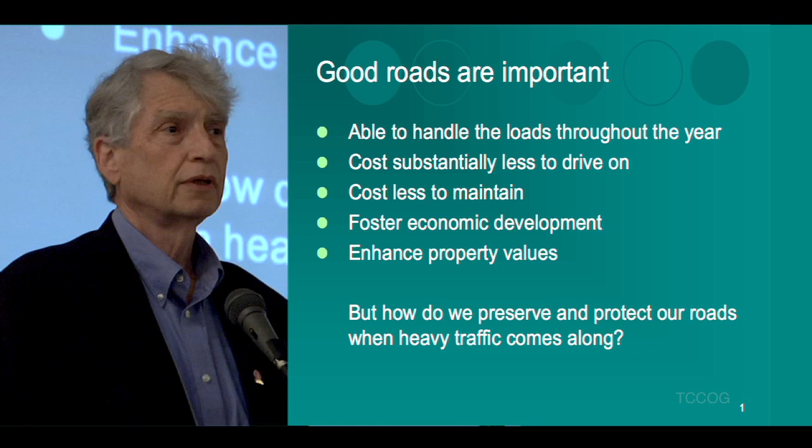New York State is pretty well roaded. There's not a lot of new major routes that are going to be built in the future. Some subdivisions are still yet to be built, perhaps, and some standards on what the roads in those subdivisions should look like can be promulgated. But as far as adding to our road system, we've got about 110,000 miles of road in this state, and that hasn't changed much in the last 30 years, and it's probably not likely to change much in the coming 30 years. So we're pretty well roaded.

Thus, we can conclude that we've got the road system that we need. It goes where we need it to go. But how do we protect our roads, especially when you get into heavily loaded traffic? That's what we're going to talk about for a while.

First of all, we need to understand the basic principles of what's going on with the road. This is a quote from the National Center for Pavement Preservation, headquartered at Michigan State University, but serving the whole United States. They define pavement preservation as a cost-effective set of practices that extend pavement life and improve safety and motorist satisfaction while saving public tax dollars.

I would point out that it's not only public tax dollars, but your own pocket money that goes into roads that are safe and smooth and work well. So this center provides a lot of information for local governments to use in trying to determine what is the right thing to do at the right time in maintaining and preserving your roads.

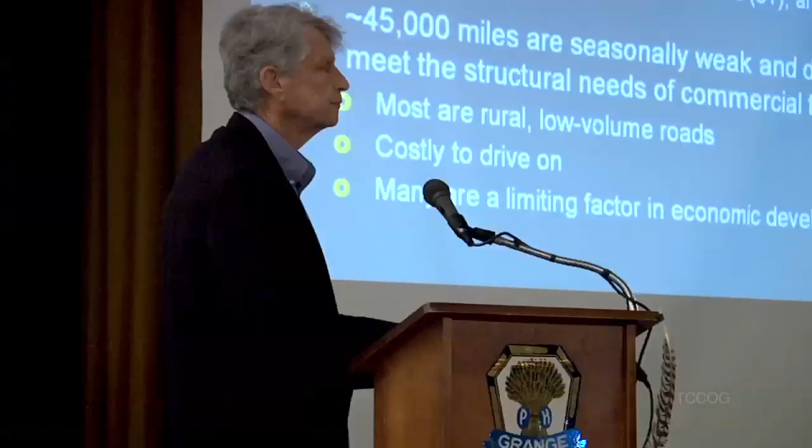One thing that came across my radar screen not that long ago was a time when we switched from hauling milk from dairies in single-unit vehicles, steering axle and a drive axle, to semi-trucks with steering axle, drive axle, and trailer axle. Those larger vehicles had a hard time getting across weak bridges, weak pavements, tight alignments that weren't really ever engineered. They were roads that went from Bill's to John's barnyard and then on over to Pete's 100 years ago. It was a pathway for a horse and buggy, and it got converted in the early 1900s into a town road.

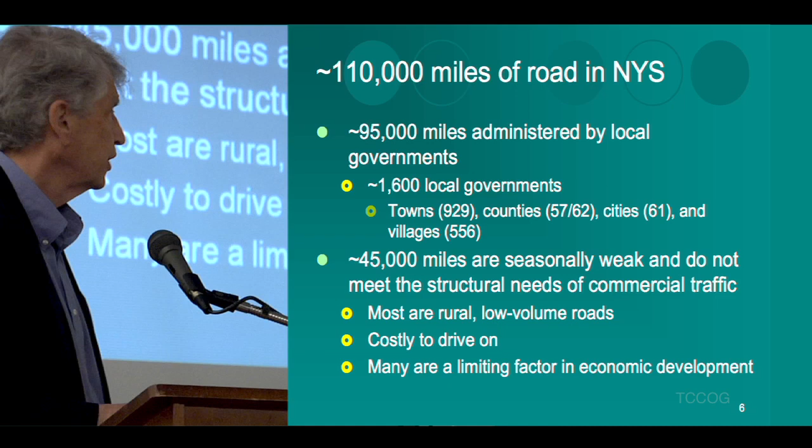Along about 1990 or so, we switched over to using much larger milk hauling vehicles, and they couldn't maneuver these roads. So guess what? Some of you may be aware that Queens Farms systematically dropped every dairy that was on a local road and went around signing up only dairies that were on main highways so they could get their trucks in and out. Too bad for anybody in the dairying business that was off on one of these side roads. That's just one of many examples of how our road system, particularly the weak roads and the poorly aligned roads, can be a factor in economic development.

How come nobody's interrupted me yet? Too early in the morning?

Okay, let's do something together. I want you all to say the word something. Ready? 1, 2, 3. Something. Now you can go back and say you said something at the meeting.

All right, so state highways. Generally speaking, the alignment of state highways was engineered, meaning the layout, the alignment, its curvature, vertical as well as horizontal, was calculated. Pavement thickness was calculated. The traffic was determined and predicted in advance, and the pavements were designed to support a substantial number of very heavy vehicles. If you hit a road like that with a burst of heavy traffic for development of a gas well, say over a period of 3 or 6 months, it's probably not going to have any consequence at all. It would use up a minuscule fraction of the life of the road.

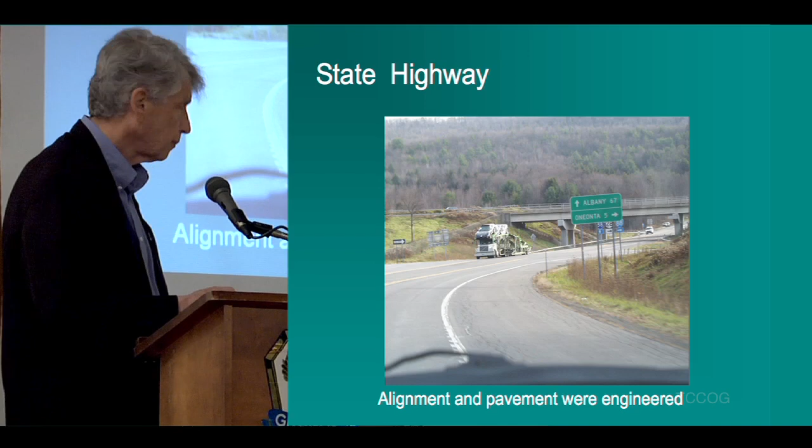Well, I suspect what you're thinking about was associated with the garbage hauling up into, where is it, Cayuga County, I think? No, this is a quote-unquote leaked document where New York State DOT was looking at the impact of frac trucks.

Well, I disagree with them. I don't know what was motivating such a thing, but we've run some numbers in our operation at Cornell, and according to our calculations, you wouldn't know it on a state highway for one well. Now if you had hundreds and hundreds of these things going on for years, that's a different colored horse, but the impact of just adding a little bit more truck traffic to what's already out there—if you're dealing with roads that have 10,000 vehicles a day, 5 to 10% truck traffic, and you add another 1,000 trucks, I think you know, without even having to calculate stresses and strains, that it's not going to have a major impact.

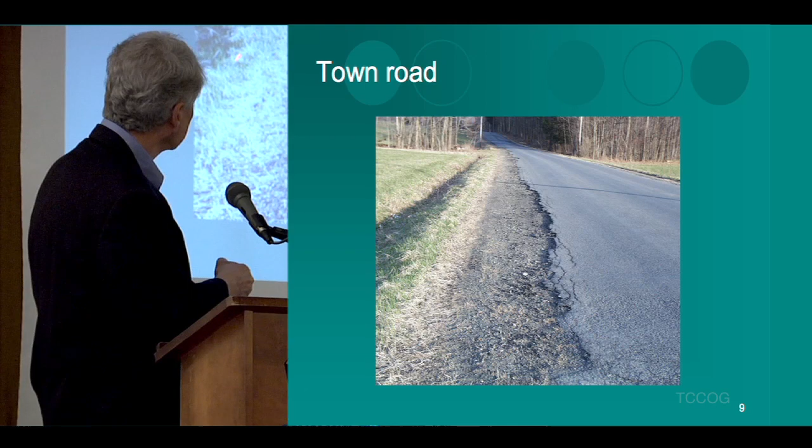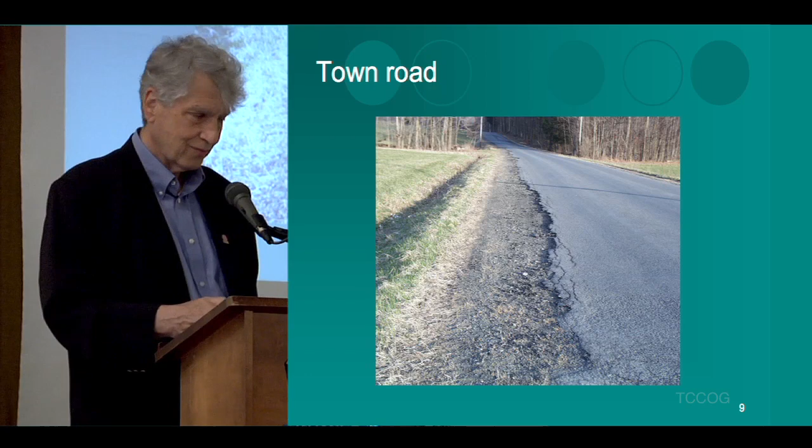Road strength isn't constant throughout the year. That's a principle that I'd like you to remember.

Local roads often are seasonally weak due to poor drainage and due to the use of low-quality materials. What do I mean by low-quality materials? Well, sometimes we open up a gravel pit and it's got a lot of silt and clay in it—not ideal for serving as the base course for a road. It might have been fine once upon a time when that road was a gravel road. It had to have some silt and clay in it to hold the larger stones in place, give it a little bit of abrasion resistance and so on. But it wasn't paved, so any moisture that got in there could come up through, the road could breathe, and it would evaporate away.

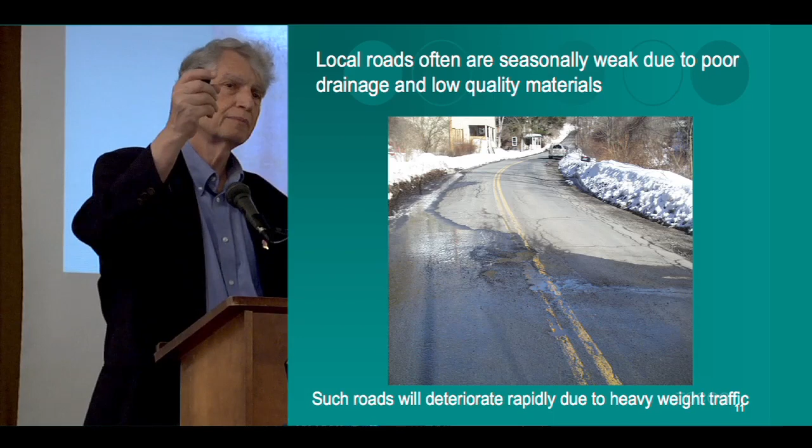Enough fines in there to shed water so that water didn't penetrate going down from above too much. But then we pave over it—we say, let's pave our roads. So we get out there and we put a thin surface, just a membrane. And you've all had the experience of laying a tarp or a tent out on your lawn overnight in summertime. Next morning you get up and you lift that tarp up, and what's dripping from the bottom side of the tarp? A whole bunch of water, right? So that's evidence that water comes up. When it hits an impermeable surface like the plastic tarp or a sheet of paper, it condenses in the cool air and makes the area right beneath it very wet.

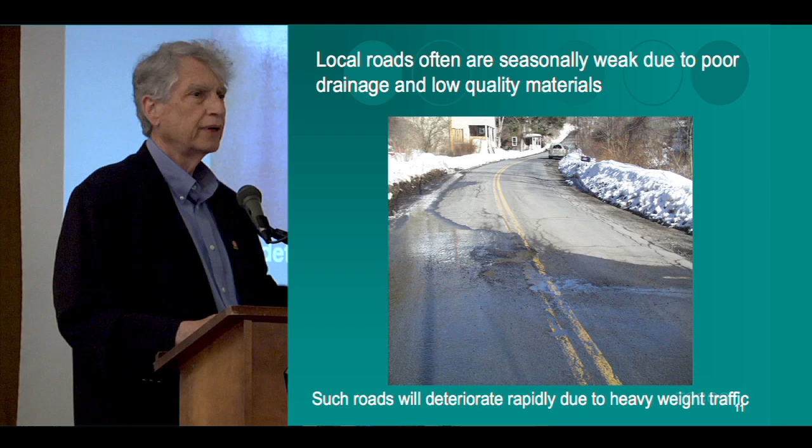You put together the combination of water and high fines content, high silt clay content of the materials, and you wind up with a situation where the bearing capacity, the structural supporting strength of the material, is very poor. So such roads deteriorate rapidly, especially if you have heavyweight traffic. And so we'd like to avoid creating any more of these if we can.

What do we do about it? Well, we have to pay attention to the drainage needs of the road. Putting out cones doesn't make the water go away. We need some downhill slope.

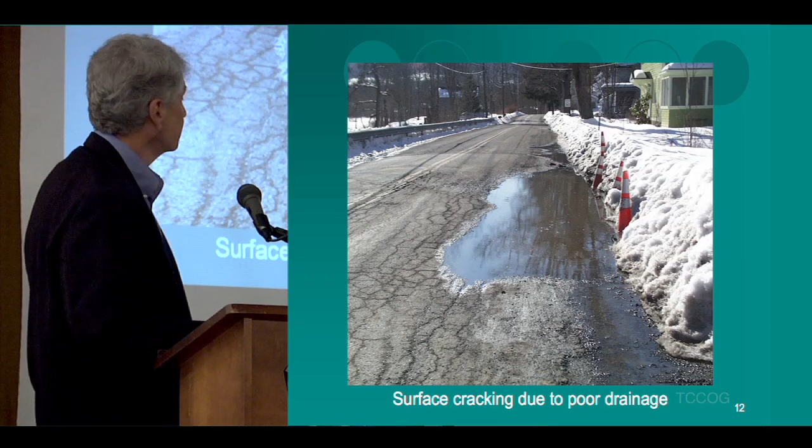You can see that the water has caused regional cracking in the area of the surface because of the combination of water and weak materials beneath the surface. And spring thaw aggravates that situation quite a bit.

This is sort of a concept of how road strength, or bearing capacity, or load supporting capability varies with time of year here in New York State, if we go from January to December. When the ground is frozen, the road is very strong.

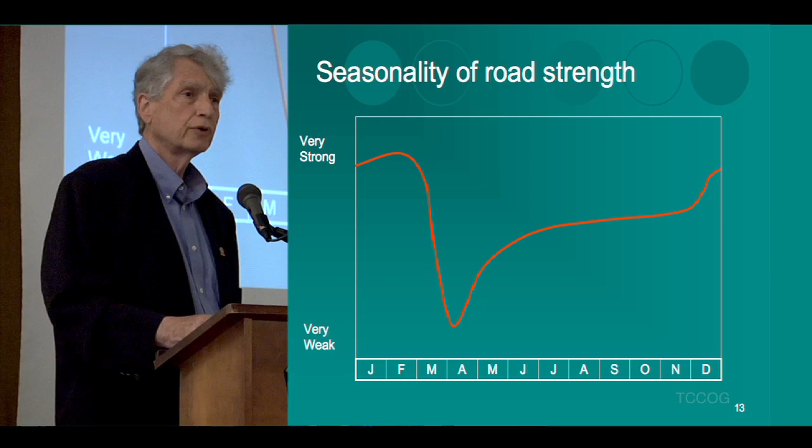Probably can't hurt it with the biggest loads you could throw at it. But then we get into a period of weakening with that interaction between water and thaw.

Generally, roads thaw from the top down as well as from the bottom up. So you wind up with a situation where there's high moisture content in the road, a still frozen zone, and then a never frozen zone. That still frozen zone prevents water from going down, and it's usually too cool to promote any evaporation of consequence. So it's sort of like trying to drive a truck on a waterbed. It doesn't work too good.

But gradually over time, as we go through the spring and on into the summer, there's a continual increase in strength until we get frost penetration back down in the road again, and it goes up to very strong. That's pretty much what happens.

So when we drive a vehicle on a road that exhibits this kind of characteristic, it makes a whale of a difference how much damage for a single pass a given vehicle would make, whether it was right at the bottom of spring thaw, or whether it passed right there at the top of the frost season. How much damage it does.

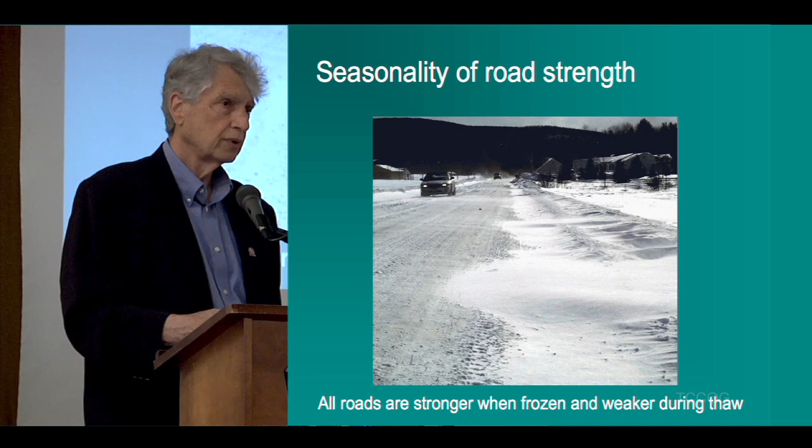All roads are stronger when they're frozen and weaker during thaw. That's true of state highways and local roads and so on. Just the magnitude of that difference between winter and summer is a lot more noticeable on local roads.

So the damage per pass of one truck is not the same on strong state highways versus weak local roads. The damage per pass of one truck is not the same at different times of the year on a given road. And thus cost allocation, when we try to figure out what the bill to the user of the road should be, cost allocation based on the number of truck passes is a flawed approach.

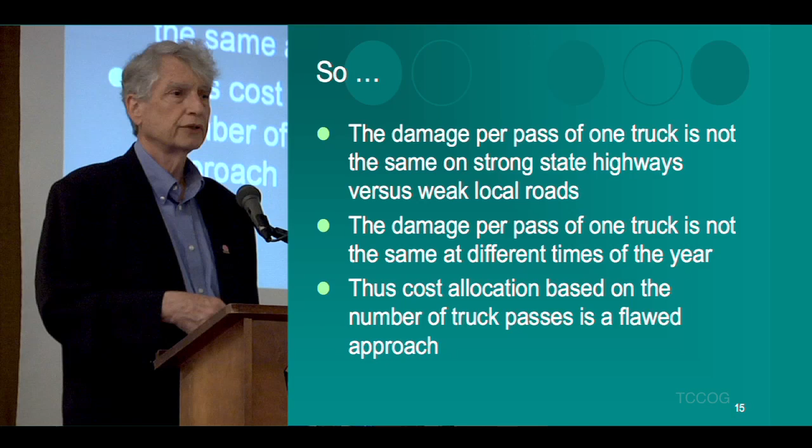And to the best of my understanding, that's exactly what Pennsylvania is using. They just said, tell me how many truck passes you're going to have, and we'll tell you how much you owe us for damage to the road. And I'm saying, well, now wait a minute. It makes a heck of a lot of difference whether those trucks went over in December or whether they went over in March as to how much of the life of the road got used.

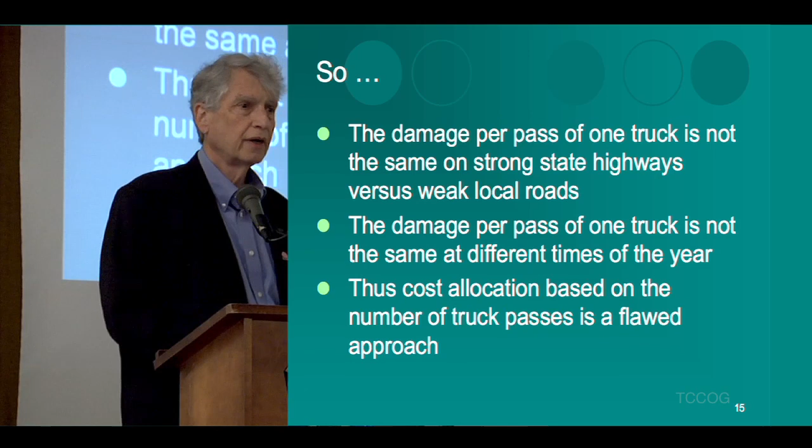So we need to get a little bit more sophisticated, I think, than just a cost per trip or damage per pass or cost per pass type of approach. Roads deteriorate over time.

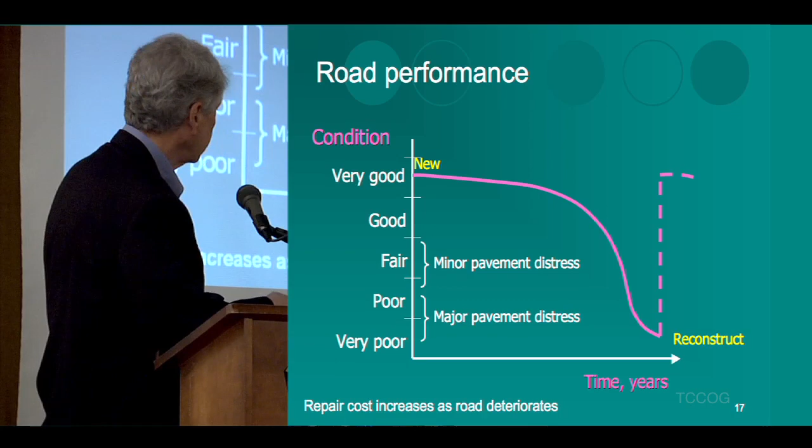This is referred to as the performance curve. Now our time span is in years, and that could vary from one category of road to another. For a state highway, the time from real good condition to totally gone to pot might be 30 to 40 years. On that chip sealed road that I was showing you earlier, the town road might be 3 or 4 years.

So a lot depends on the structure that's there, what this time scale is, but all roads tend to follow this kind of a pattern: when they're new, they stay in pretty good condition for about two-thirds of the life of the road. And then the effects begin to become evident. Finally, as we get down into what we refer to as fair and poor condition, we begin to see visible distress.

Well, that leads to an interesting thing. If we try to figure out how to allocate costs for road damage based upon distress, going out and charting the cracks and the ruts and so on and so forth, we've got to have distress in order to be able to do that. Which means that if you happen to have a road that was recently rebuilt...

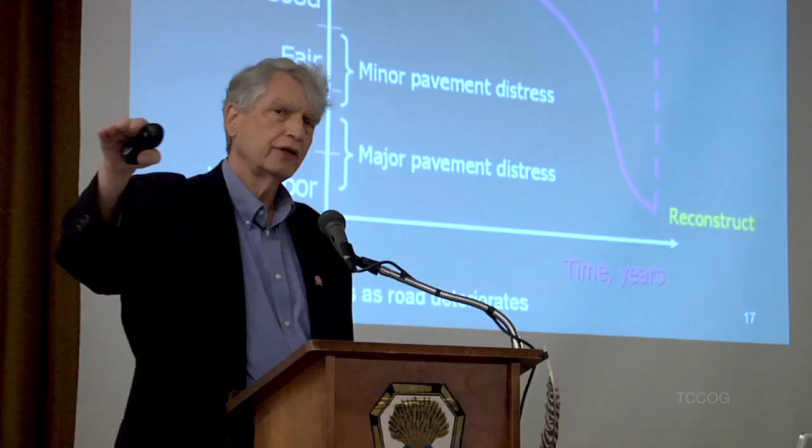Well, there hasn't been too much change in traffic over time. There's 1 or 2% growth per year in a high growth area, and less than that in a standard growth area.

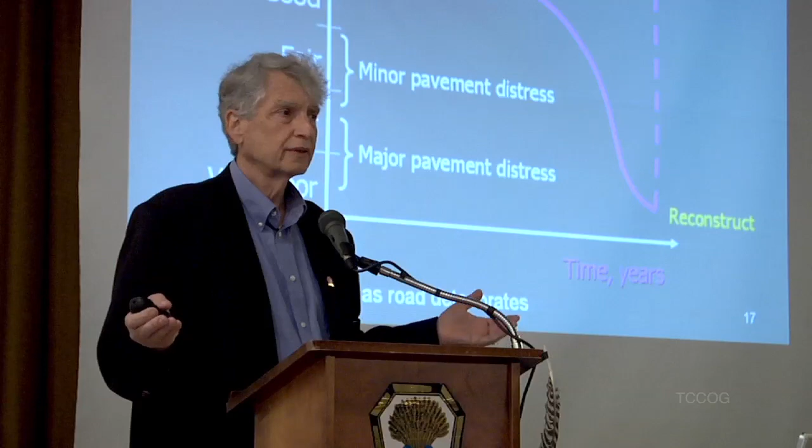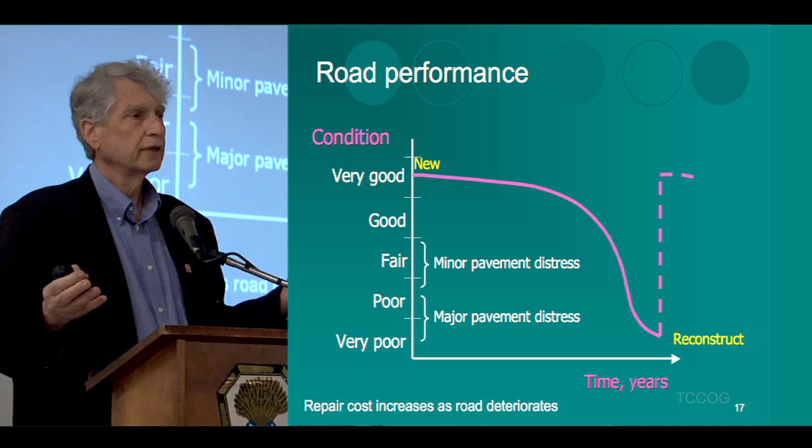If things don't change much more than that over a 10, 15, 20-year period, you're not going to see too much difference between when the road is new and when it's used up. So we develop a body of knowledge. When we divide the state into 1,600 units of local government, each unit has a small patch, slightly larger than a breadbasket but smaller than would extend across different physiographic regions or soil types. So we gain from experience, and we have a pretty good sense of how long it's going to last. The person in charge of the road system does what is needed when it comes time to reconstruct or recondition a road, based upon past experience.

If after that commitment has been made and the taxpayers have forked over their money to build that road, there's suddenly a jump in heavy truck traffic, even for a short period like 6 months, which is about how long it takes to develop a wellhead, you wind up using up a pretty large portion of the life of the road. So the engineered road isn't as adversely affected as the ones designed by experience.

One other follow-up question: typically local governments don't let roads go all the way to the point where they need to be reconstructed. So what would this curve look like if you were to do some intermediate repair or resurfacing?

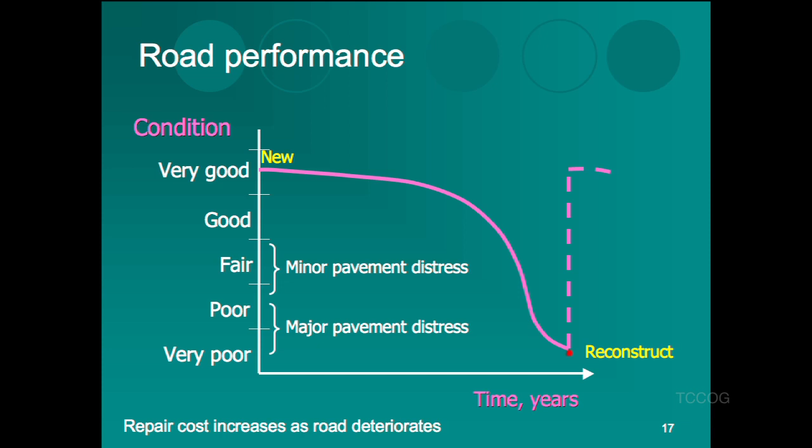Did I over-answer your question, or did I answer your question? The thing I'd like you to notice is that the distress doesn't begin to show up until you get into the last third or so of the life of the road. And if you repair that road, put it back up to good condition—smooth and very good—it costs less to do that than if you wait until it's badly deteriorated and then try to fix it.

If I understand what you've just said, if you wanted to charge the trucker for the decrease in lifetime of the road, it wouldn't be enough just to measure the decrease in quality of the road—you'd have to know where on this curve you were, which might be tough to do. There's a better curve we could work with, and we'll work our way toward that better curve in a few minutes.

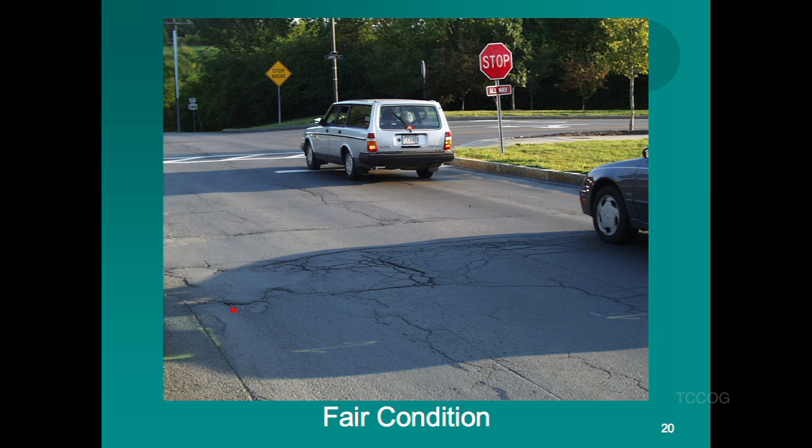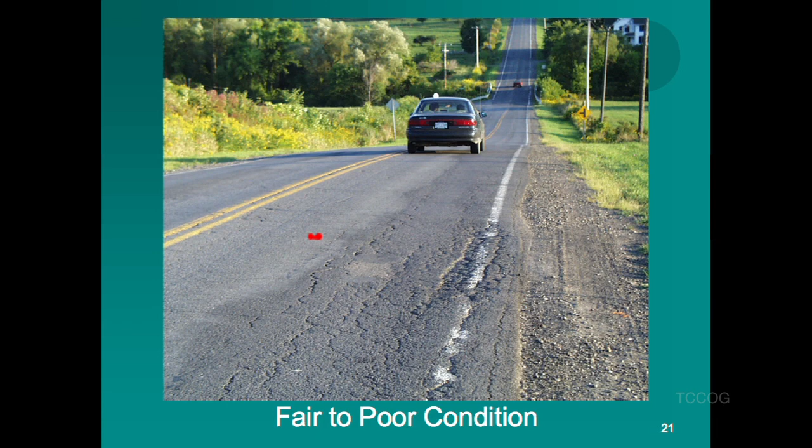Here we've got some patching, minor cracking, probably due to frost heaving, maybe a utility cut. So that's fair condition. This could either be fair or poor, but over here on the side it's poor. Out here in the middle it's fair, so I just call that fair to poor.

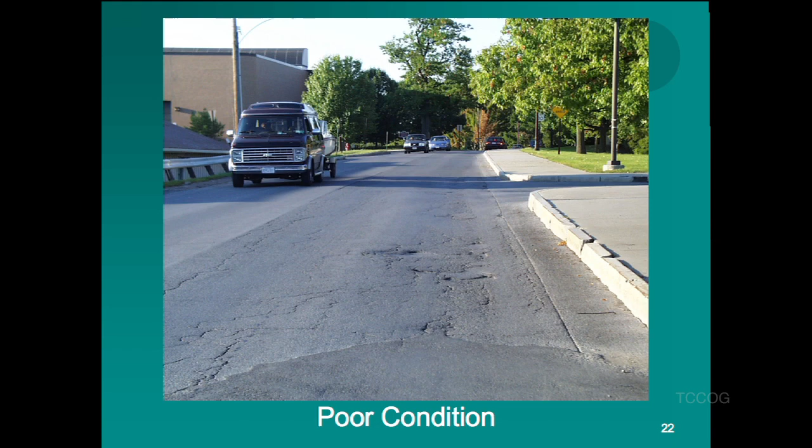This is definitely getting into the poor condition. There's a big patch that I'm standing on there, and some pretty significant roughness. Longitudinal cracking, transverse cracking, pothole. So that's about what you'd call poor.

Probably on the order of 35 to 40 cents when you take taxes out. You have to be very careful about how you do this economics of roads, when you account for taxes, because where does the highway department get its money to build the road? Taxes. Who's paying the road user costs? The driver. Who's paying the taxes to the highway department to build the road? The driver. And so if you aren't careful how you handle the numbers, you'll double count those taxes. So this is on the order of 35 to 40 cents.

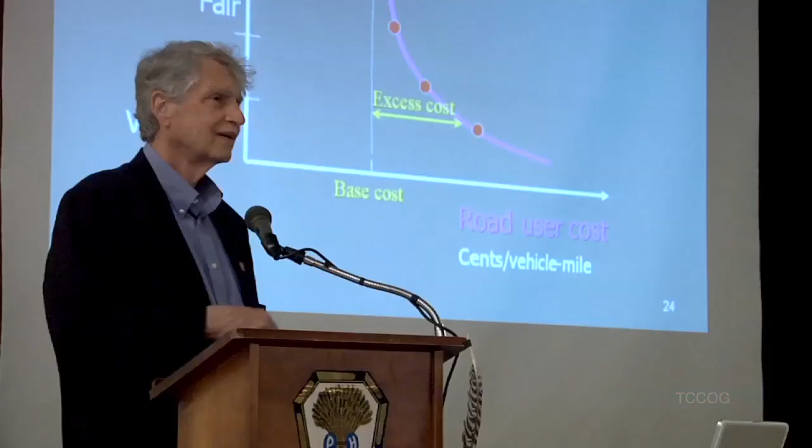Sorry, but the other way around, have the cost be vertical? I used to have it the other way around. I switched it so that it would tend to, well, you know the other graph that I had there. I wanted to get two scales that were common rather than having it vertical on one and horizontal on the other. Shoot me. It's okay.

Another question? So, the highway department spends money to build a road and maintain it. Road users spend money to drive on the road: vehicle depreciation, gas, oil, tires, new shock absorbers every now and then, and so forth. How many here would say that the road user cost is 50% or less of the sum of the two parts? How much the highway department spends to build and maintain the road, plus how much the road user spends to drive on the road. All the traffic collectively: 50% or less is road user costs, 50% or more is highway department costs.

How many would go there? A couple. Okay, wrong. Too low. I know I did. I sucked you right in, didn't I? So let's bump it up here.

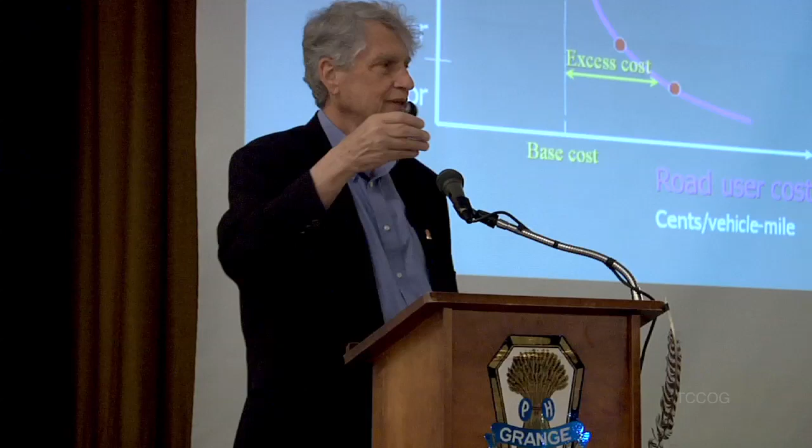How many of you would, I'll tell you that we're too low at 50% road user costs. How many of you would go with 75% road user cost, 25% highway department? Now how many of you we got in the game? Plus all of those that raised their hand earlier, right? Because you're covered. Okay, still wrong.

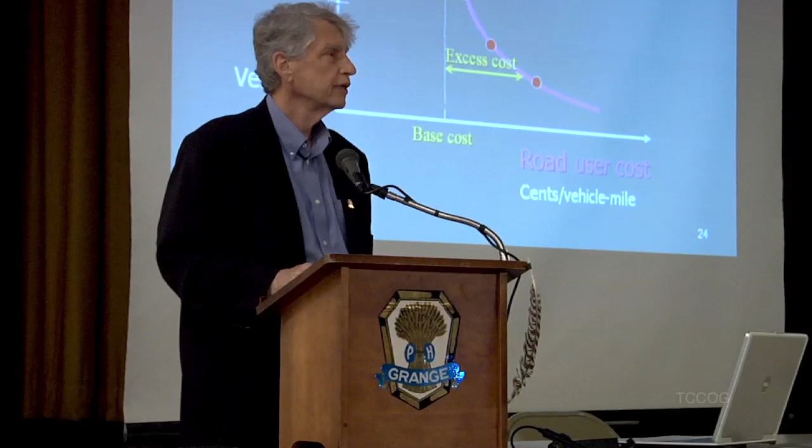Shall we go for 90? How many of you would say road user costs are about 90%, highway agency costs are about 10%? Show of hands. Not very many. How many of you say it's more than 90?

Well, it doesn't make too much difference whether we're talking interstate highway or town road. It ranges in a fairly narrow band between 90 and 95% of all the costs of going on a road is road user costs. 5 to 10 cents on a dollar is paid for by the agency, spread out over a substantial number of years.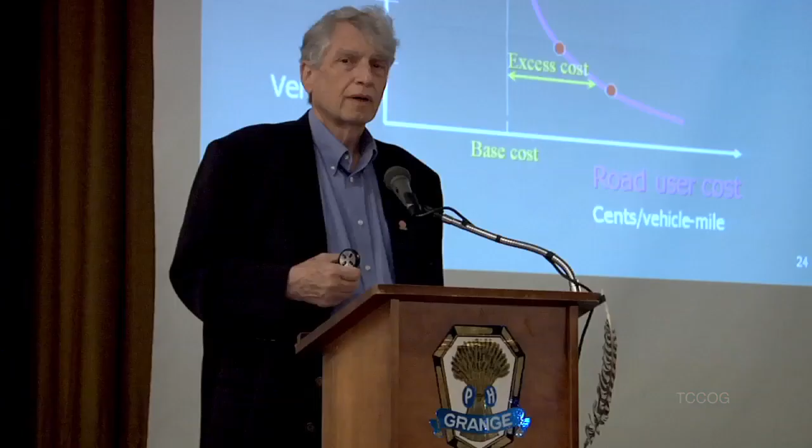And so when I see a road in very poor condition, my wallet begins to twitch and I begin to say, please, please, please spend a penny of your damn nickel to make my 55 cents per vehicle mile go down to 45 cents, if you would, please. And it turns out to be very cost effective to keep roads in smooth condition.

But how on earth would you explain, with all the training we've given the citizens of New York State, that we don't come out and fix roads until they cause complaints? How would you explain to people that you're out there repaving a road that looks perfectly good?

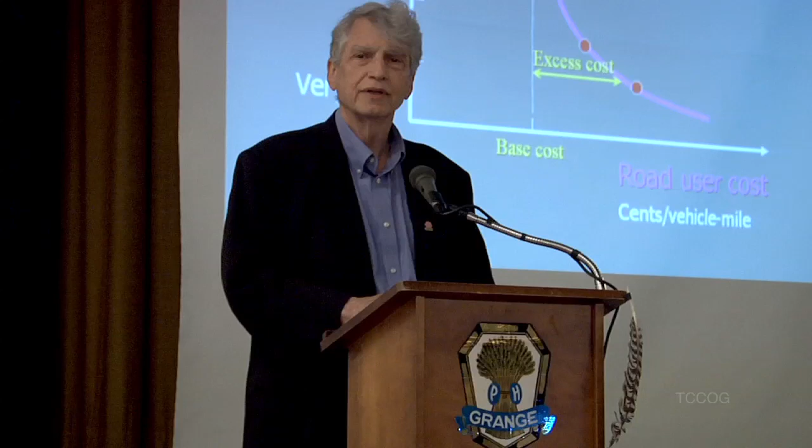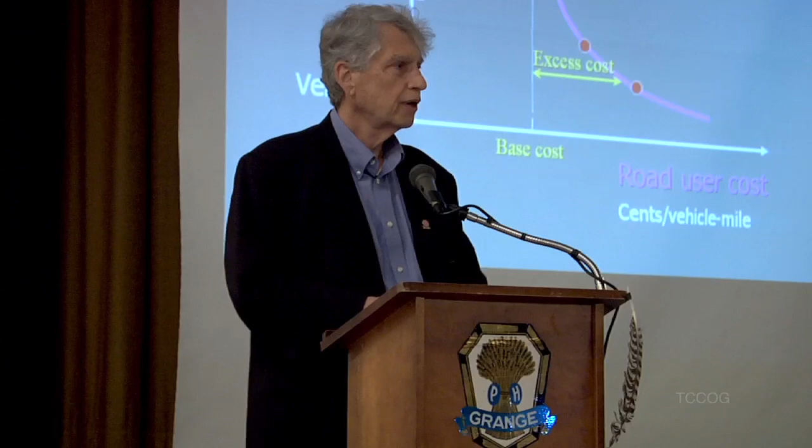Be tough, wouldn't it, when there's other priorities? Those funds have to compete. Those roads have to compete for funds with other priorities. So we can let it go.

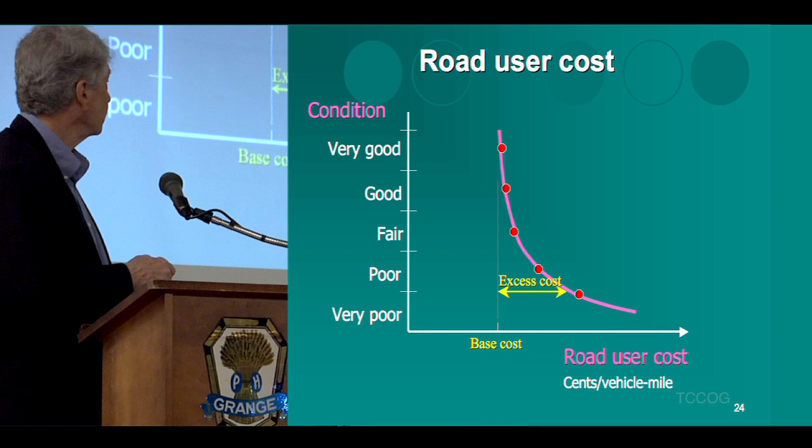But the consequence of letting it go is this excess road user cost. If the public knew what we're doing to them in terms of excess road user costs by having weak and deteriorated roads, they'd probably get pretty concerned.

So I was planning on sending an article into the Syracuse newspaper to tell everybody this.

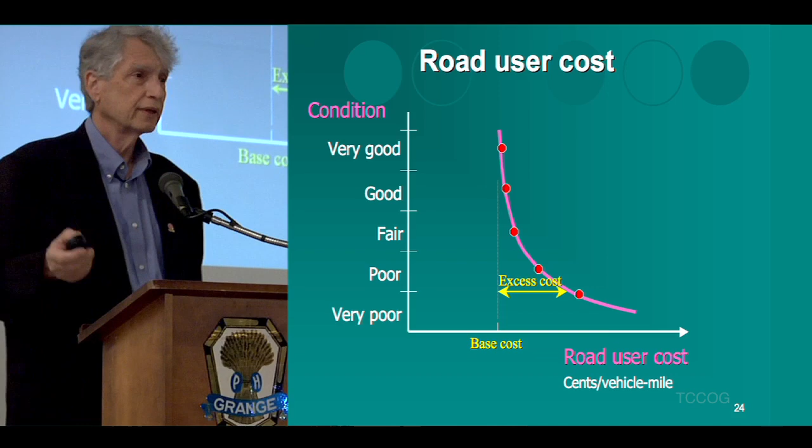So, basic engineering principles. What causes road failure? Heavy loads, lots of traffic, seasonally weak materials, poor drainage, and just the passage of time, which in engineering parlance we call cumulative damage. All of these cause that condition curve to take a dive eventually and go from good to poor condition.

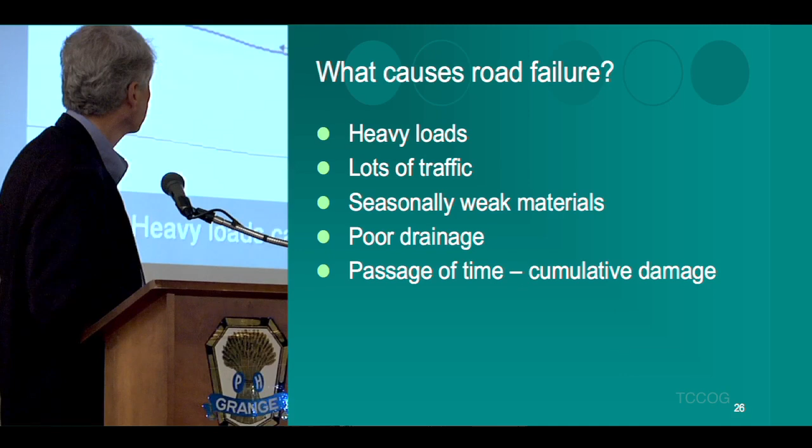What's going on in the roadway underneath the vehicle tire? Let's think of it as a truck tire. It's got a tire pressure that pushes on the surface and an axle load that pushes on the whole system, which bends the surface, bends the base course, and puts a vertical pressure on the subgrade.

Heavy loads cause big deflections. Why do we care? Because big deflections cause roads to not last very long. So why are state highways able to withstand lots of heavy trucks and town roads aren't? Well, they put more substance in there. They typically use better quality materials, and they sure as heck put them down a lot thicker.

My colleague David Orr and I have been out coring roads around New York State on state highways for a research project over the last few years. We've come up with as much as, I think the biggest was 17 inches of asphalt concrete that had accumulated over time on roads that were perhaps first paved around 1930 or so. You'd see a layer, then another layer, then another layer and another layer, and by the time you cut a hole in it, it was 17 inches deep. And that was just the asphalt. Underneath that was a heavy layer of unbound gravel as well.

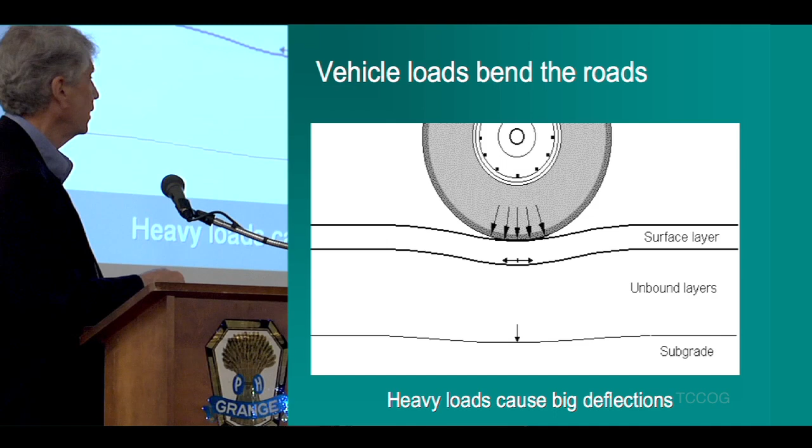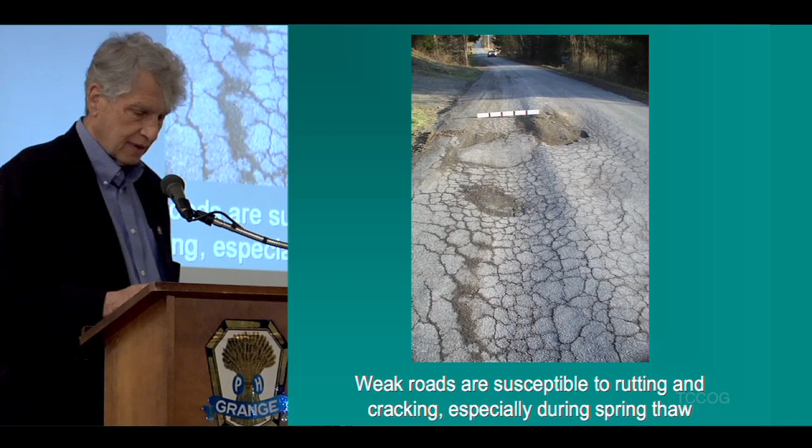I used to have a colleague that said no student project was ever a total failure. It always could be used as a good, bad example. And I think this is, without any doubt, a good, bad example.

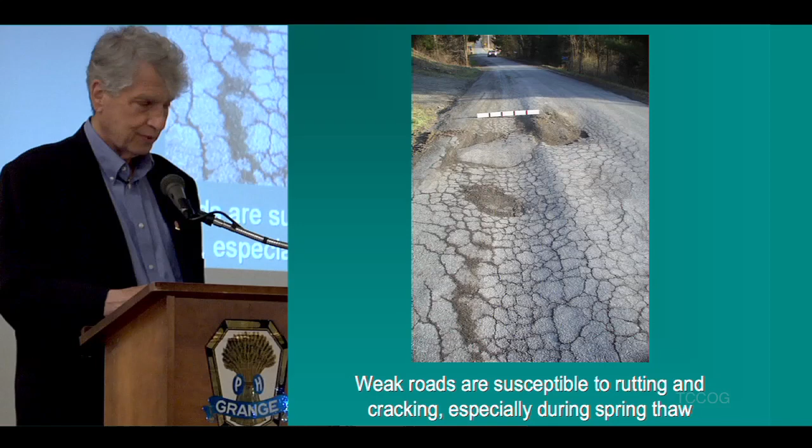So let's think about something that you've probably done absent-mindedly, just sitting at your desk or somewhere in history. You took a paper clip and bent it back and forth and back and forth and back and forth, and pretty soon you had two halves of a paper clip, did you not? Anybody here who has not yet done that? 100%. Okay, we have something we can talk about together then.

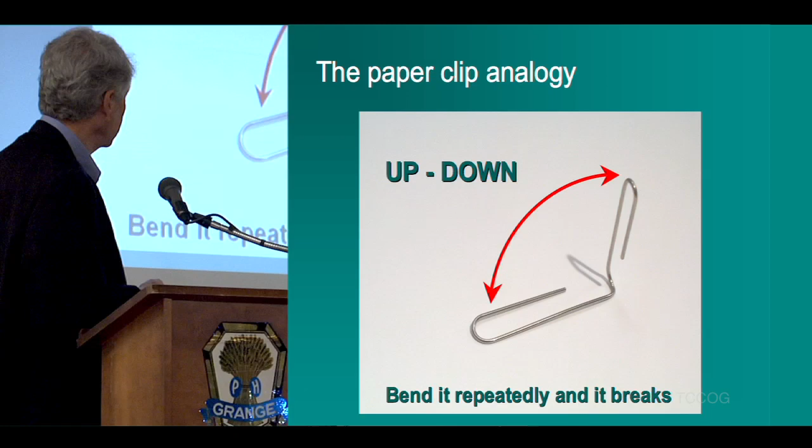So if you took a paper clip and bent it repeatedly, it breaks, but let's make it a little more complicated. Let's take a dozen paper clips and have three conditions. One, we open it up to 45 degrees and then fold it back down. Take a different paper clip out of the pile, open it up to 90, bend it back down to closed. And then another one, 135, which is 90 plus 45, and bend it back down. What do you suppose is going to happen?

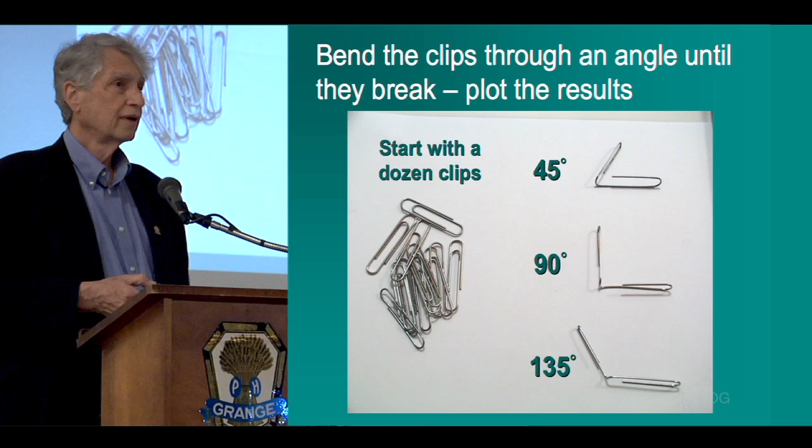Eventually, they're all going to break, but the one with the bigger angle is going to not take so long. So here's what it looks like.

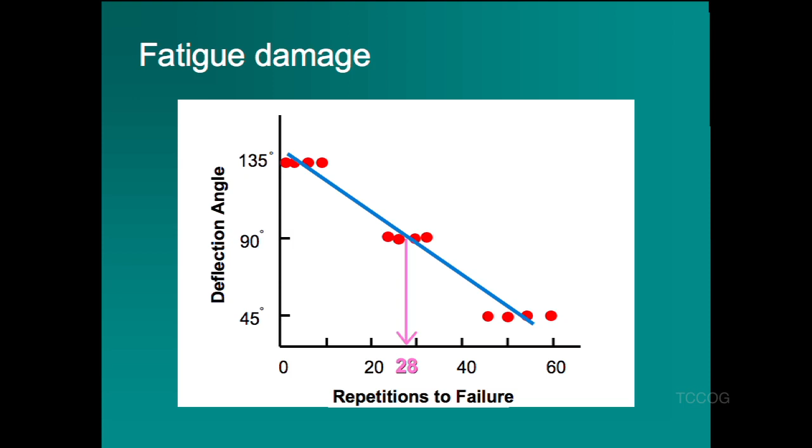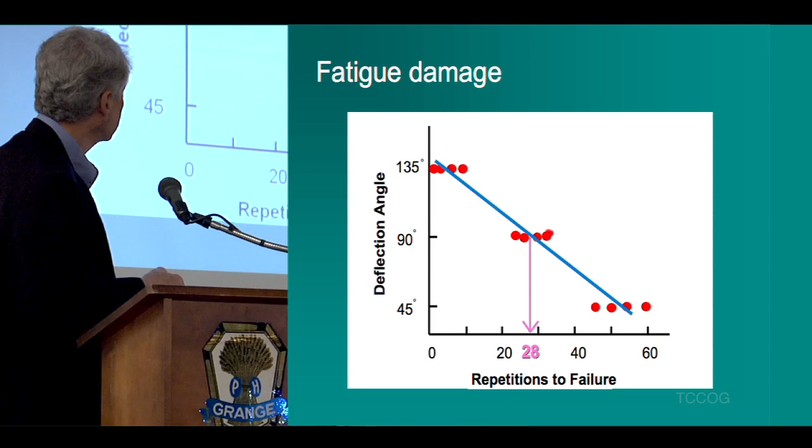At 135 degrees, just a couple of bends back and forth, and it's kaput. At 90 degrees, it lasts a little longer, and you'll notice how the data is scattered—a statistician would say it's stochastic. You don't get the same number of repetitions to failure out of every paper clip, but as a group you can begin to find an average. The blue line represents the average, and at 90 degrees the average is about 28 repetitions to failure. These are the big, hefty paper clips, not those cheap little things with notches in them.

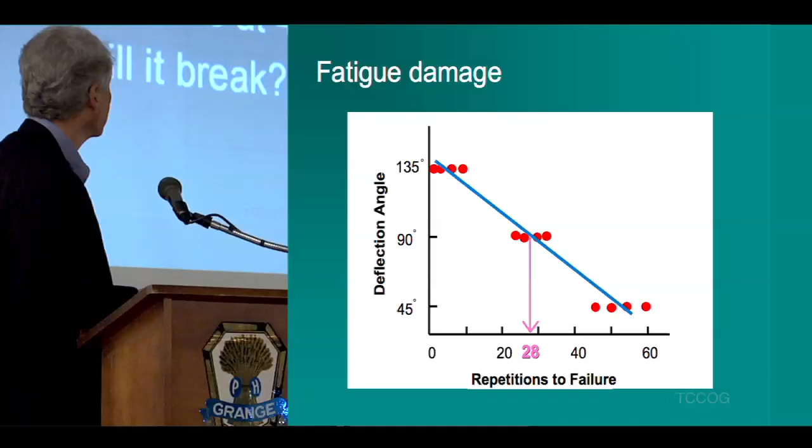Okay, let's make it even more fun. Let's bend one paper clip 10 times at 90 degrees and 22 times at 45 degrees. Who can tell me whether it'll break or not? No? What makes you say no? Who said that? You're right.

Here's how I know you're right. We'll take that curve and discard the data points since we don't need them—we'll just work with the blue line. At 90 degrees, we could allow 28 repetitions, but we're only going to put on 10. So 10 out of 28 allowable is 36% of the life of that paper clip.

Now we'll bend it to 45 degrees. We could expect 52 repetitions, but we're only giving it 22—remember, 22 of these and 10 of those. So 22 divided by 52, added to the other, gives us a sum of 78%. That's the cumulative damage. It's stochastic, so it might break at 78%, but that's far enough from the line that I'd be willing to bet it wouldn't break. So you're right—you see how that works?

This could be a heavy truck, and this could be a not quite so heavy truck—that could be a Volkswagen. But depending upon the vehicle, the amount of damage per pass differs as a function of the loading.

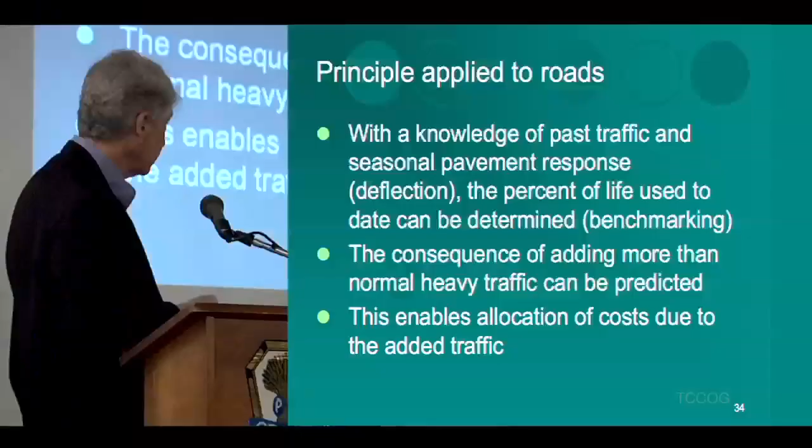So when you apply that paper clip principle to a road, with knowledge of past traffic and seasonal pavement response—pavement response just being fancy words for the deflection of the road—the percent of life used to date can be determined. That's what I refer to as benchmarking.

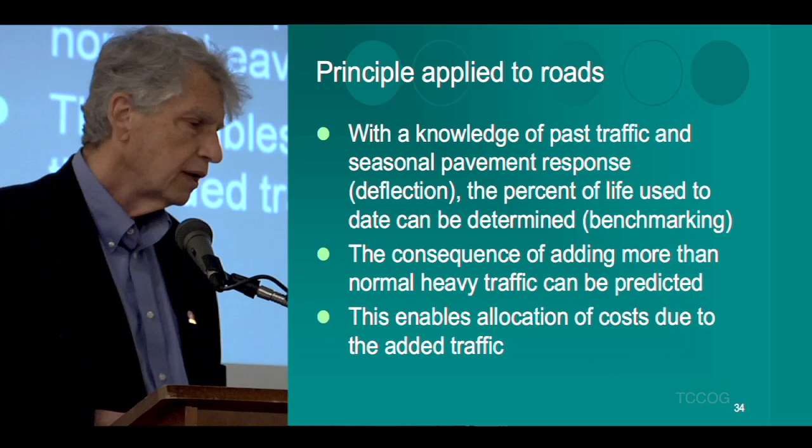The consequence of adding more than normal heavy traffic can be predicted, and this enables allocation of costs, especially if I leave it alone, due to the added traffic.

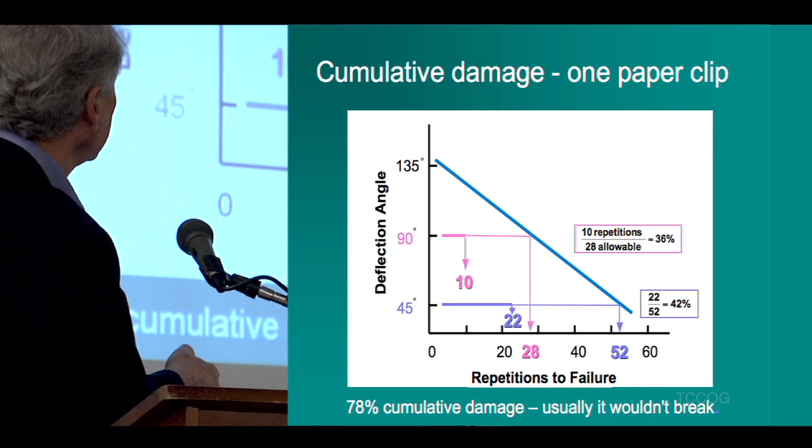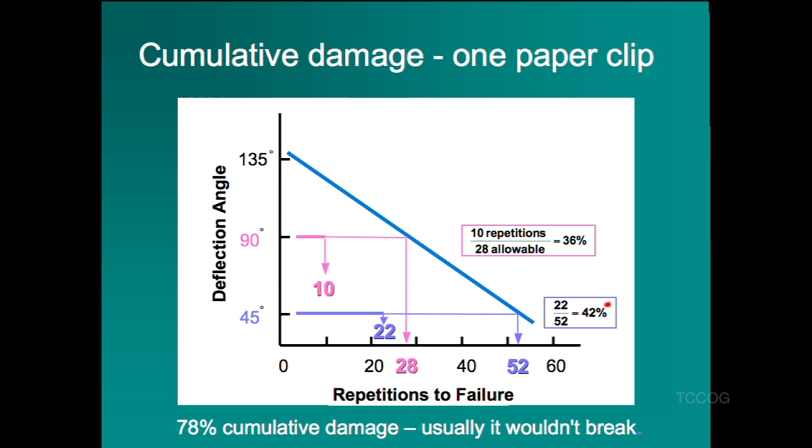So we have a mechanism here. If we have this kind of information for the materials, and a means of measuring the pavement deflection or response, we can get into something with real science behind it—figuring out what would happen if a burst of heavy traffic were superimposed on top of normal traffic, and how much of the life of the road is used by the heavy traffic versus the remainder.

Now we need to talk a little about policy, because while engineering influences things, policy as developed by policy-making boards has an impact too.

As mentioned earlier, a road is built by the community to last a given period of time, or instead we could talk about it in terms of number of load repetitions—one translates to the other. That's based on historical traffic levels and experience. So the reason we have 3 inches of asphalt and 12 inches of gravel is because that worked over the last 25 or 50 years.

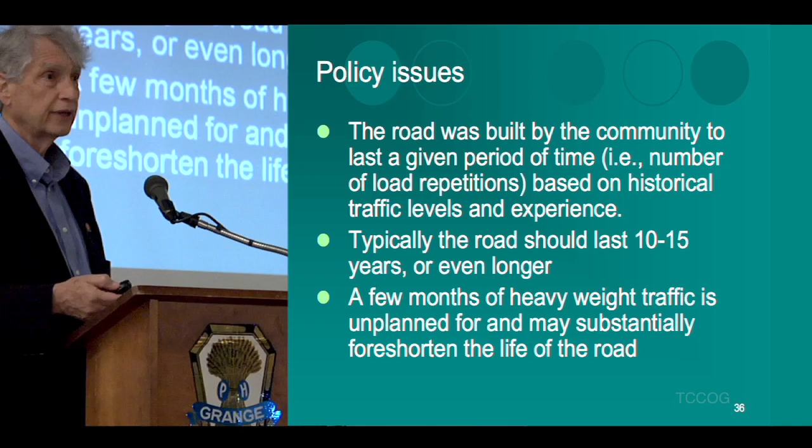Typically, what we design is expected to last 10 to 15 years, or perhaps even longer. But a few months of heavyweight traffic, unplanned for, may substantially foreshorten the remaining life of the road—whether we'll really realize the original 10 to 15 year expectation. It'll be less than that. So the policy aspect is that taxpayers aren't actually going to get the full life of the road due to unexpected heavy traffic.

Should the taxpayers pay for the lost life, or should the road user—particularly the one putting the heavy traffic on—pay for it? When and how much should the road user pay? Should it be paid before the first truck hits the road, or after the last one pulls off? What's the best strategy?

And this cumulative damage concept is the key. Question?

My understanding from listening to you speak before, and being my neighbor and having walked the roads with you, is that local roads that are not designed can actually take very few truck trips. Can you talk about the general load carrying capability of an interstate highway versus a state road versus a county versus a town road? How many trucks could they take? I know you speak in terms of ESALs, and maybe you want to define that term and spend a little time with that.

Yeah, I was not going to get into ESALs today, but I can. ESAL is an acronym for equivalent single axle load. We can take a mixture of traffic, everything from Volkswagens to overloaded trucks, and translate them into an equivalent number of single axles, 18,000-pound single axles, which was used in research back around 1960 or so. By doing that, it makes the computations more simple. We can talk in terms of how many ESALs a wellhead development is going to apply, and how many ESALs the road can expect to last. Instead of talking about it in terms of years, we can talk about it in terms of repetitions of load.

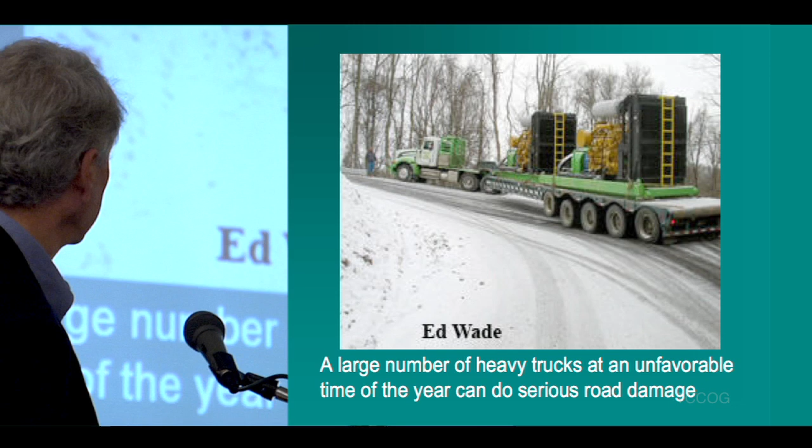So a large number of heavy trucks at an unfavorable time of year can do serious road damage, is the point.

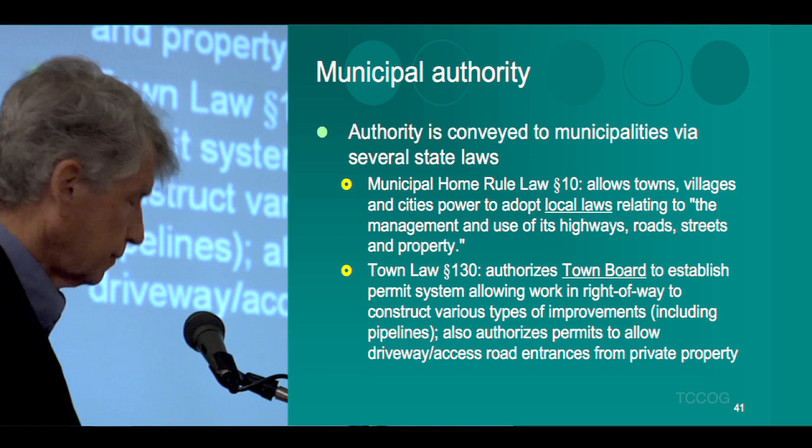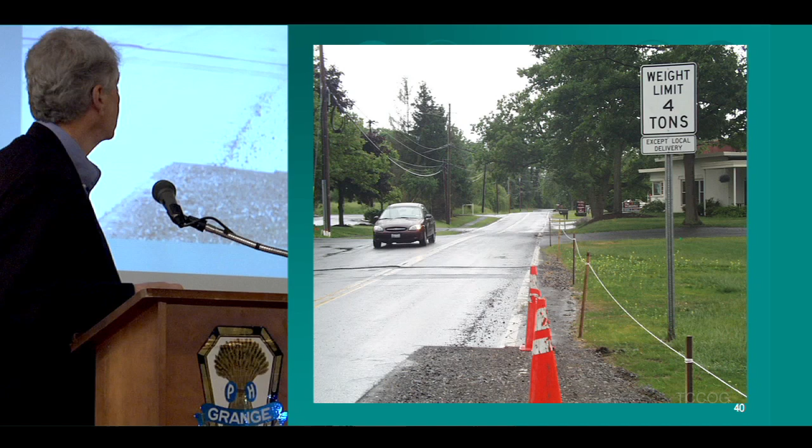What regulatory measures are available to you? Load limitations is one thing you can do, but that impacts everybody - the traffic the road was originally developed for. How many school buses are less than 4 tons? Not very many. How many garbage packers are under that? How many fuel oil trucks are under that? So you need to be cautious about how you implement policies in this regard, or you can have a huge negative impact on the local economics.

I'm not going to go too much into the authority because that's the subject of the next speaker, and I promised him I would only just kiss this.

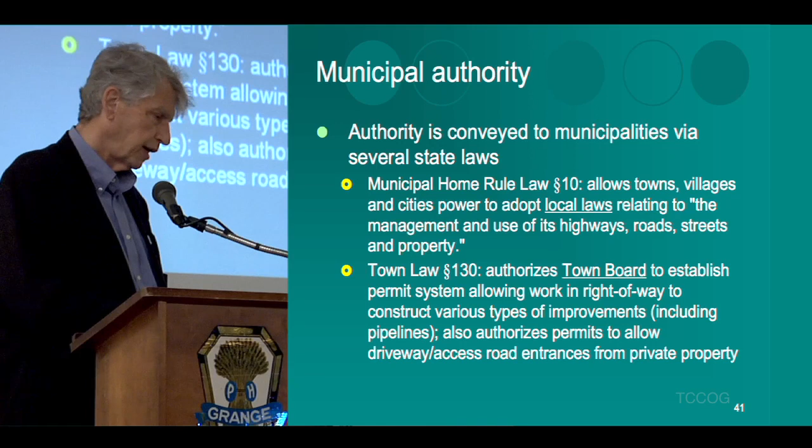Authority is conveyed to municipalities via several state laws. One of them is the Municipal Home Rule Law, which specifically allows towns, villages, and cities the power to adopt local laws relating to the management and use of its highways, roads, streets, and property. That's pretty vague. Town Law 130 authorizes town boards to establish a permit system allowing work in the right-of-way to construct pipelines, driveway entrances, and so on.

More meaty is a set of laws in the Vehicle and Traffic Law that need to be adopted by local law or ordinance, enabling you to set weight limits, designate truck routes, and set hours of operation for use of such vehicles. So you have the authority, and you really don't even have to write your own laws - you can just cite and adopt these sections of Vehicle and Traffic Law.

Up on the web at the Cornell Local Roads Program website - you can Google Local Roads Program, or even just Google local roads, I think Cornell comes up top of the list. At our website, you can get a little booklet of model laws that you can use to adopt these model ordinances.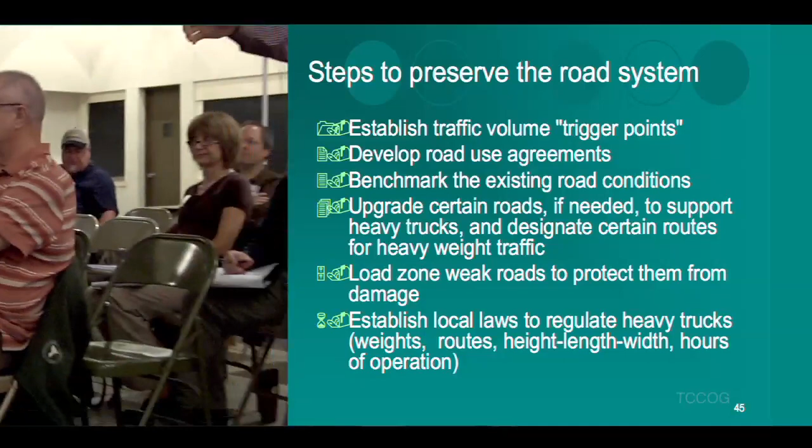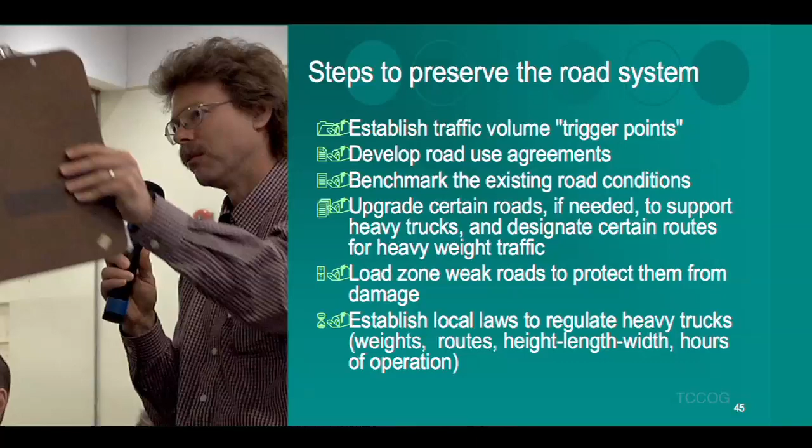So my question on upgrading certain roads is, who's paying for that? Are you suggesting that's paid for as part of the road use agreement, or is that taxpayer dollars to get the roads ready for the traffic?

No, I would say that's a primary element of the road use agreement, is how much and when.

Is it, if you want the money... it's always somebody that forgets to put the phone on vibrate.

If you need the funds to upgrade the road before the traffic begins, that can be something the parties agree to or they don't agree to. You find that out in advance of giving the permit. It's an element of the permitting process.

If you want to wait and have them provide their share of the costs of the road damage after the project is completed, that's another strategy. There's the engineering answer to the problem, but there's also the policy issue, and this is where they get stirred together and can be symbiotic with each other.

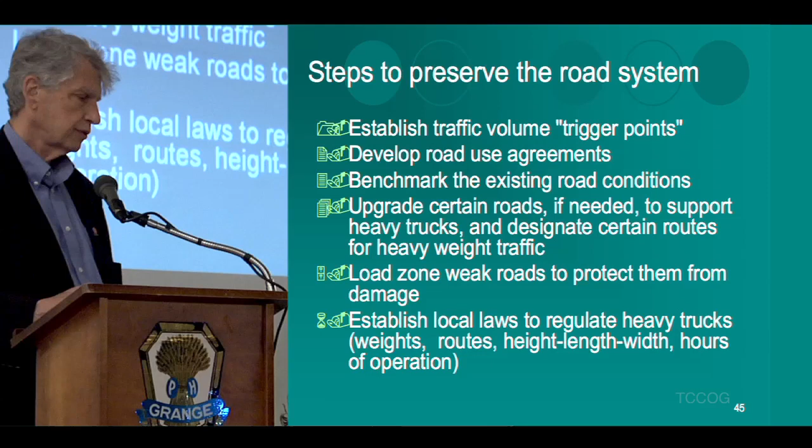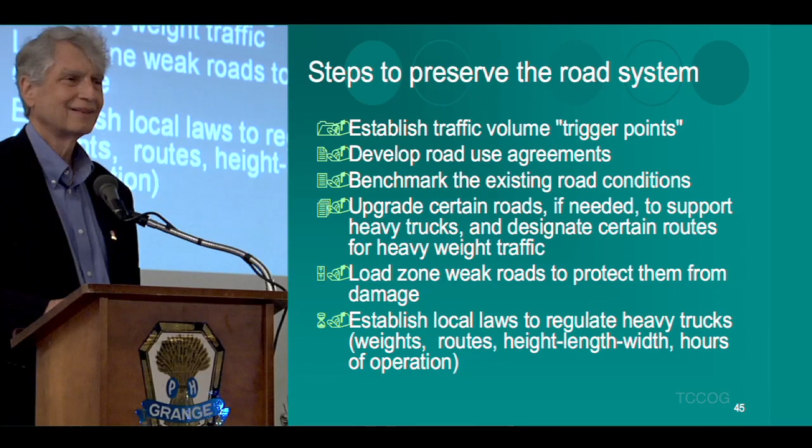You load zone weak roads to protect them from damage, and then finally you establish local laws to regulate heavy trucks, their weight, routes, height, length, width, hours of operation, color of their truck, number of tires per axle, or whatever you wish to regulate.

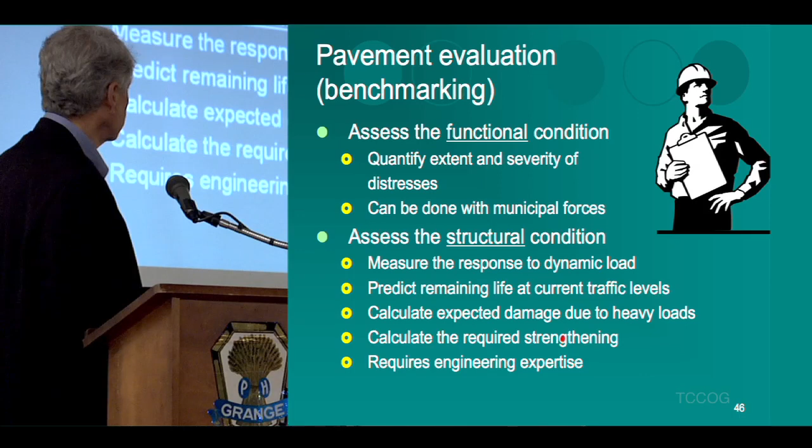In the structural condition analysis, you measure the response, the deflection to a dynamic load, predict the remaining life at current traffic levels, calculate expected damage due to the heavy traffic, calculate the required strengthening if you're going to do it in advance, and that requires engineering expertise. You can't just do this with a pocket calculator.

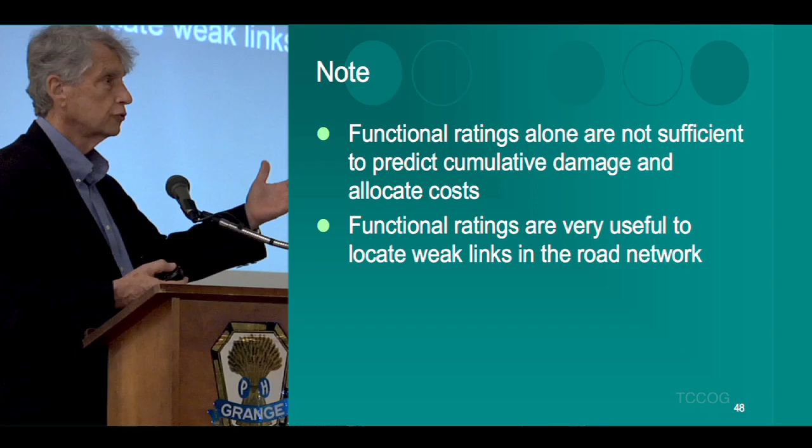One note: functional ratings alone are not sufficient to predict cumulative damage and allocate costs, because roads in good condition don't show much change in distress. Functional ratings are very useful, however, to locate weak links in the road network.

Wait a second. You can have a weak road in good condition for a long time if it has low traffic. True. But still... I don't trust you after that hand-raising incident. Oh really? Keep me honest.

If you had a weak road and nobody drove on it, what would it look like after 20 years? Would it be as good as it was the day it was born, or would it be partially shot, even though nobody used it? Partially shot due to moisture, due to frost heave more than anything else, because of the materials the road's built out of.

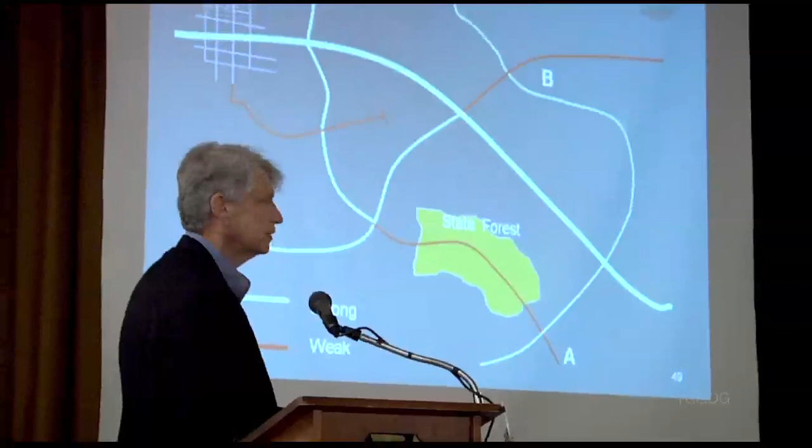But look at point A down here. Point A, that's somebody wants to develop a gas well right there, and they have to go a little ways on this road that's in weak condition. You probably wouldn't route them through the state forest. You'd probably route them out to the state highway and be done with them. After they're on the state highway, they're not your problem anymore. Look at point B.

Shortest distance to the state highway is down this road here, but it's weak. So you're faced with giving them access to this green road and going a little bit further, or strengthening this road here in order to make it feasible. And that might be worth a lot to the developer to have a shorter route, and he might be more willing to pony up to help you strengthen that road than to spend all the extra travel time and money, especially if when he gets out to the state highway he wants to go in that direction.

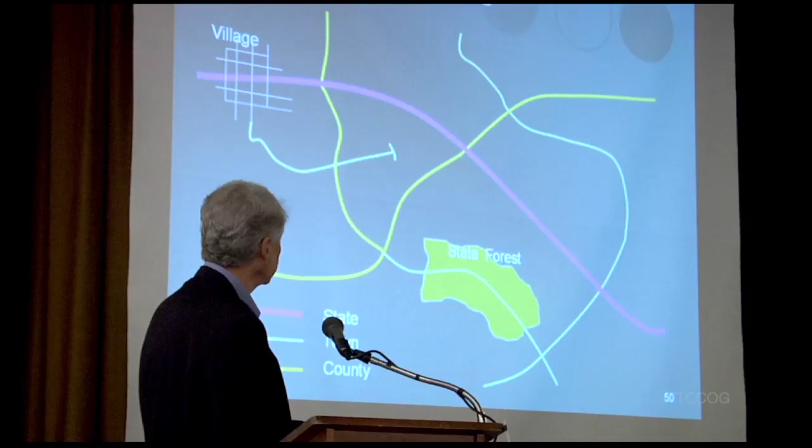So circumstances differ, and each one of these has to be looked at individually. You can't just generalize on what would be best. Here, you'd probably want to strengthen that little piece of weak road to get out to the other road. Now, if we can do this just right, you'll see that down—whoop, damn it.

Well... hello, okay, we're back.

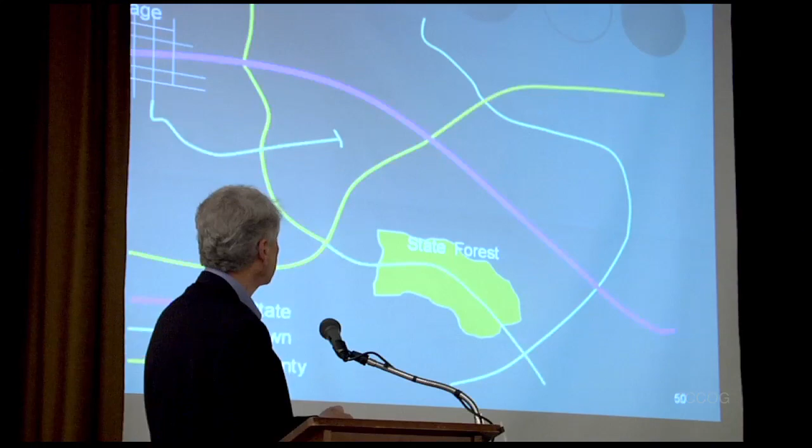The point that I was trying to make was that the same agency probably owns these two roads here. But over here, who's going to strengthen that road? The road permit probably will be issued by the town, but the road strengthening needs to be done on the county road. If you look the way I drew that, you see that? So you need to be able to work with your other agencies. Not a good idea to get each other disliking each other if you want to get cooperation in situations like this.

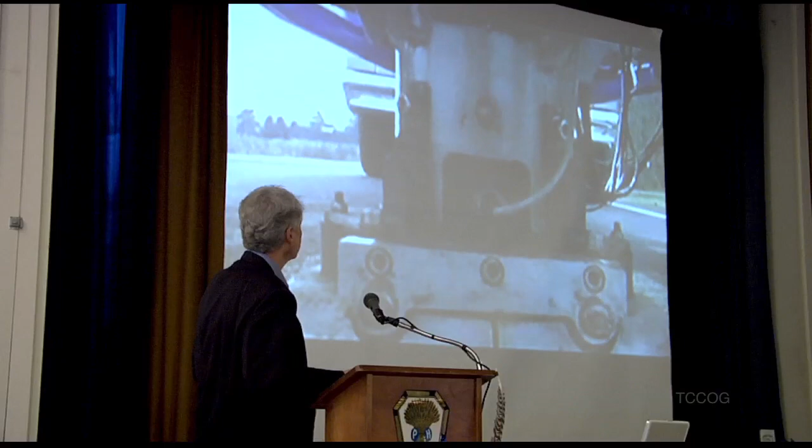It's a load cell that measures the load versus time. When you're done testing, the plate goes up, put the truck in gear, wait for the car to pass that's coming by—I could see it in the bumper there. And drive off to the next spot, which would typically be 125 to 200 feet down the road when you're doing this kind of thing.

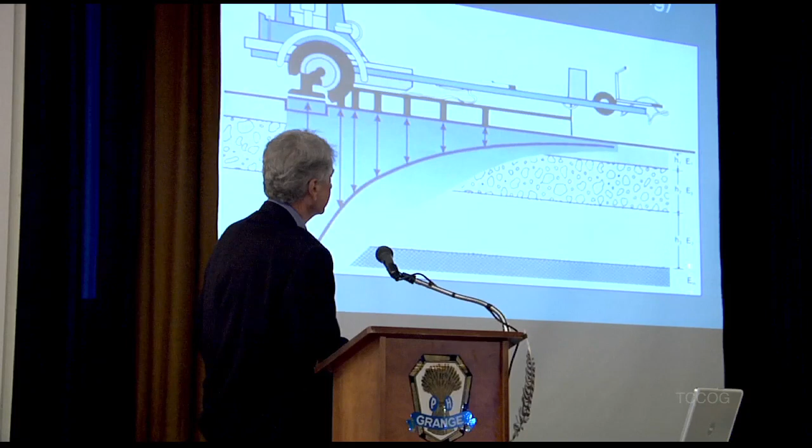So what we're after with this is we use this device to measure deflection, and this represents how the deflections distribute themselves with distance away from the center of the load. We need to know the thickness of the layers, which we typically get by either historical records or coring. And the property that we're trying to measure from this is these E values, modulus of elasticity, which can then be used to calculate the stresses and strains.

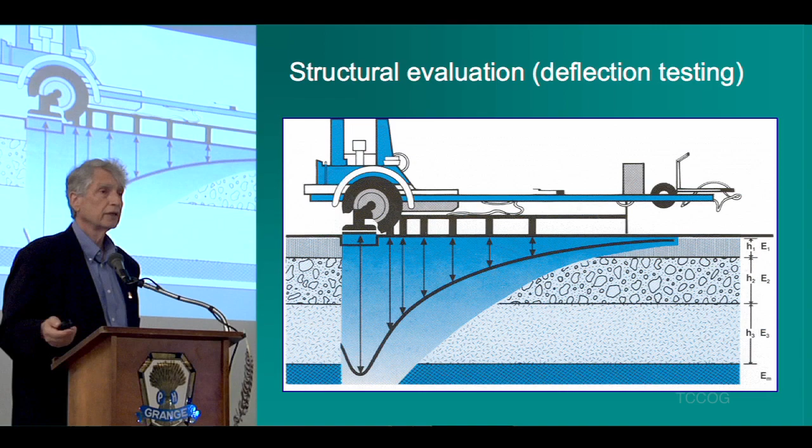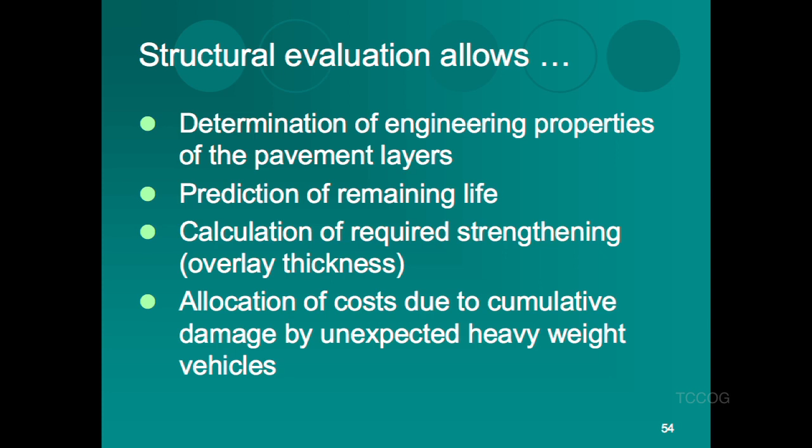And if you recall that diagram that I showed earlier of the wheel load with the tension in the bottom of the surface course and the compression on top of the subgrade, what we're trying to do is come up with the information we need about the road and its materials to calculate those stresses and strains. So it allows us to determine the engineering properties of the pavement layers, predict remaining life, calculate required strengthening or overlay thickness, and allocate costs due to cumulative damage by unexpected heavyweight vehicles. That's where that paperclip analogy we were talking about earlier gets put to work.

So in summary, what should you do? Establish a road use agreement, benchmark your roads before they get used, identify the strong and weak portions of the road system, post reasonable load limits for the roads that would be materially injured by a substantial increase in heavy trucks, identify acceptable truck routes to utilize the strong portion of your road system, and if necessary, strengthen some roads.

In the Adirondacks, we didn't get much in the way of ground freezing. So if you had a winter like this past winter, there pretty much wasn't any freezing down there.

Heavy truck traffic in the wintertime, if you just categorically allow it without any limitations, and then you get a winter like we just went through, you could do a lot of damage to the road.